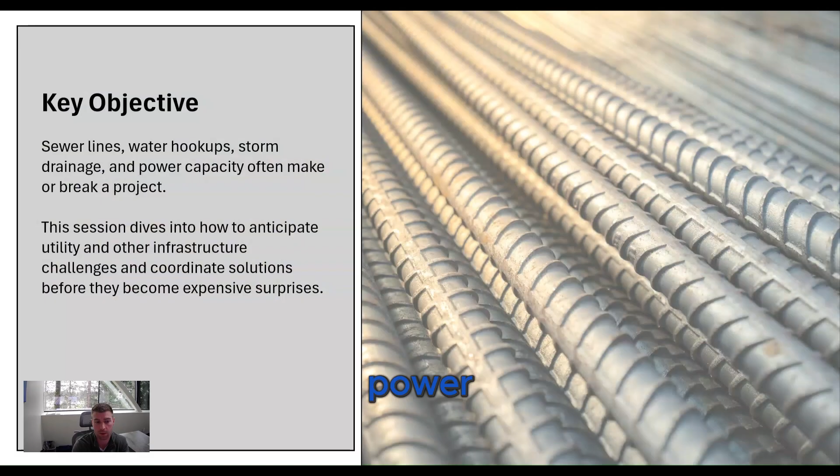All right, so we're going to be talking about sewer lines, water hookups, storm drainage, power—all the things that really make or break a project. So stay tuned as we go through those for more information.

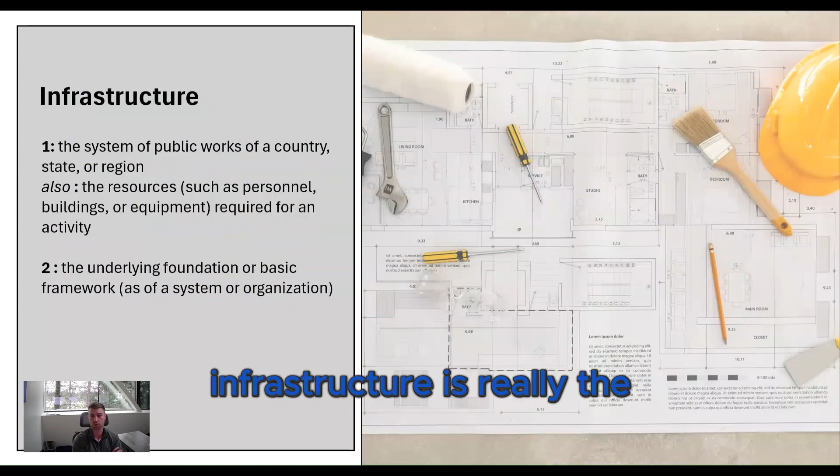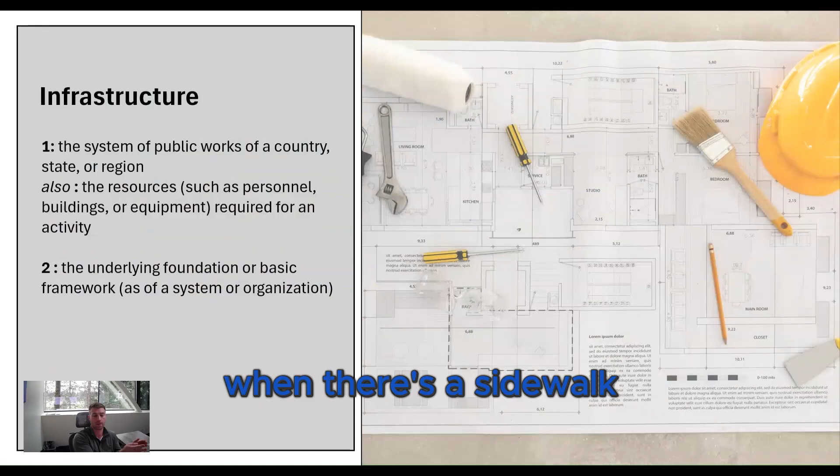All right, so if you don't know what infrastructure means, if this is a newer topic for you, infrastructure is really the public road around the property you want to develop. A lot of people get confused when there's a sidewalk and then a planter strip, thinking that's their property. In reality, the back of the sidewalk, which is up against your property line, is really where your property line starts and the public property begins.

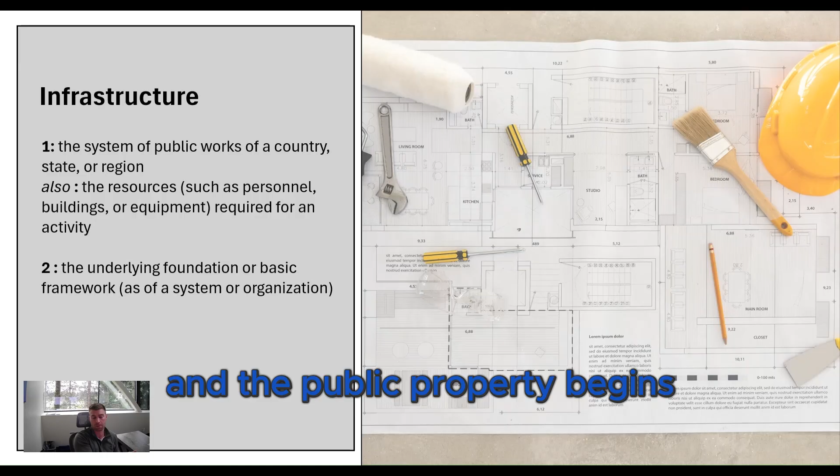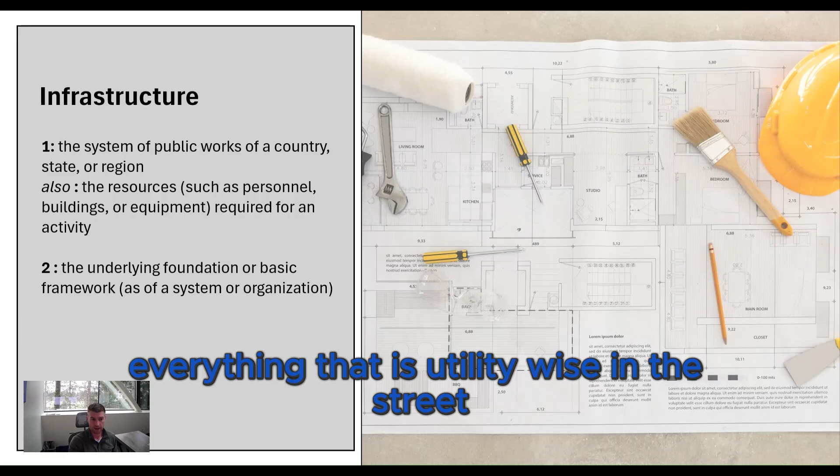So sidewalk, landscape strips, all the street work is obviously all public, but everything that is utility-wise in the street is also public. Your private property that connects into the public sector with all your power, water, sewer, and whatnot is really where you need to look for hookups and infrastructure upgrades.

All right, so in every city you have different requirements. The city of Kirkland's requirements are different than the city of Bellevue, different in the city of Redmond, different in the city of Issaquah. So one thing that's really important is making sure you're working with a good, vetted team that has worked in multiple jurisdictions, understands the process, and can ask the right questions to make sure you get good answers—to make sure you get the response and information you need to design a project that's going to be acceptable when submitted to that city.

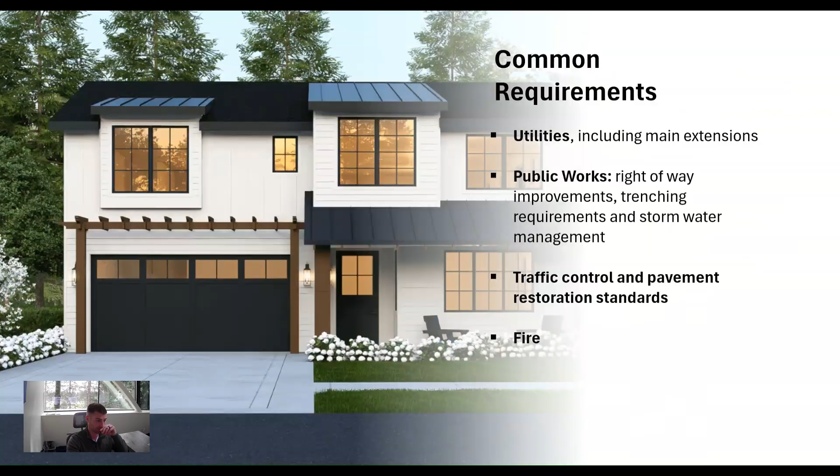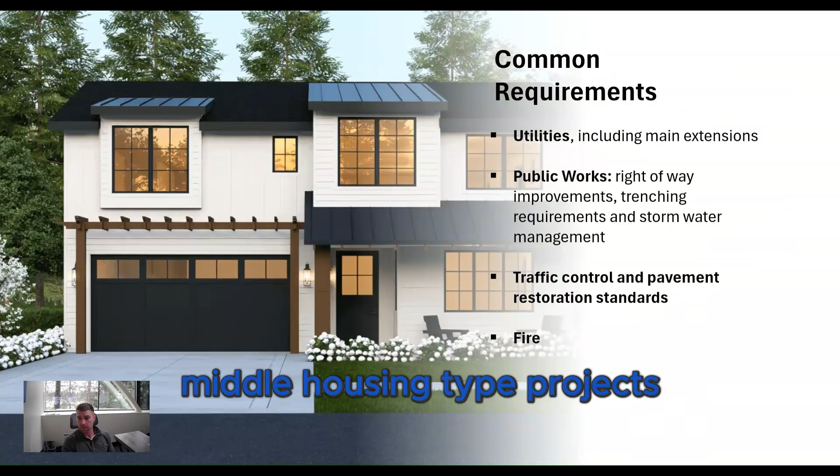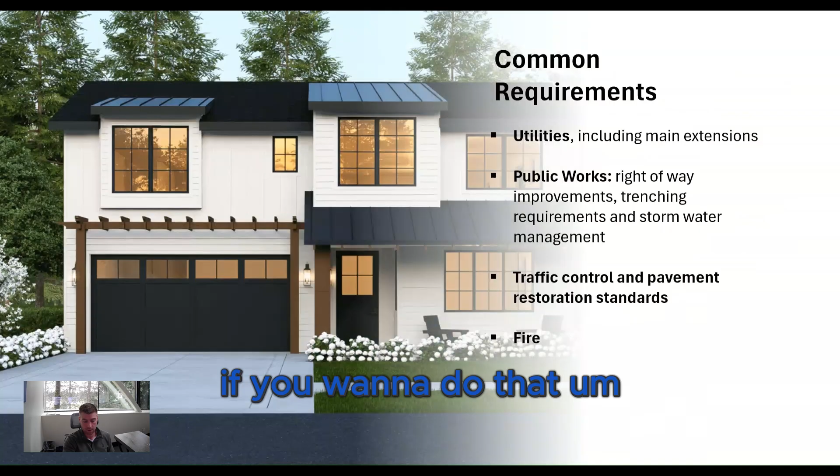All right, so common requirements. When you're doing infill middle housing type projects, if you're not tearing one house down to replace it with just one more, you may have to do utility main extensions—because what was one house is now going to be 3, 4, or more. That may mean you have to upgrade the sewer, upgrade the storm, upgrade the power transformer, or bring gas to the property if you want to do that. So these are common requirements, definitely things you want to look at.

And how much does that cost, and how long is it going to take, and how much does that impact the project financially to make it either not make sense or it still makes sense because the property can absorb those costs. Doing these works is going to create traffic control, you're going to have to do pavement restoration and whatnot. So just some things to really think about as you're developing a property.

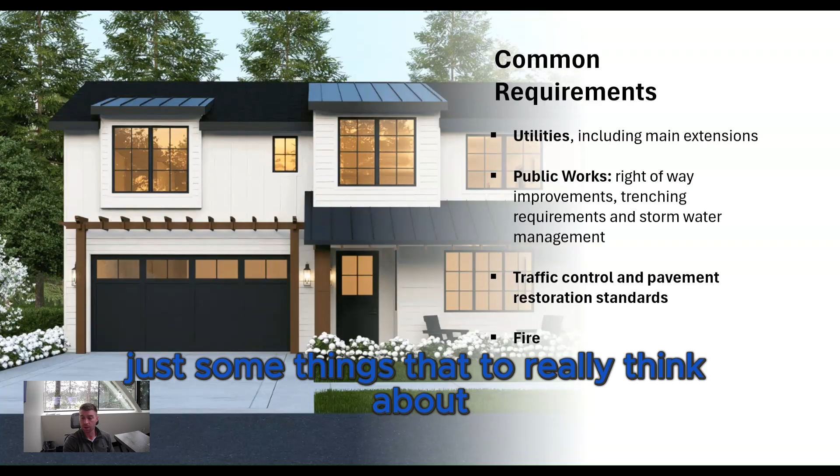As far as permitting and review agencies go, you're going to be working with multiple different agencies within the city or jurisdiction as you're talking about infrastructure and right-of-way improvements specific to that one project. And that's not including all the other things. You're going to be working with the city planning department, which is going to include public works, which is going to include fire, which is going to include the utilities. And sometimes the utilities are not always within the city, they're within a different jurisdiction.

So for example, if you're in the city of Kirkland and you're building in Finn Hill or Juanita, you're going to have to work with Northshore Utility District, which is going to serve that lot within that city for your sewer and your water, but your gas is going to come from PSE and your power is going to come from PSE. So you may be submitting a project for city approval, and you may not know that you have to actually submit a different set of plans to the utility district, which is going to review, approve, and sign off on the utilities that the city doesn't actually manage.

So sometimes people get this wrong. We've had people come to us and say, hey, I got this project, and I'd ask, well, did you talk with Woodinville Water? Did you talk with Northshore Utility District? Did you talk with these other jurisdictions that are not within the city, but are kind of part of the whole project? Knowing what to ask and how to get through it is super important.

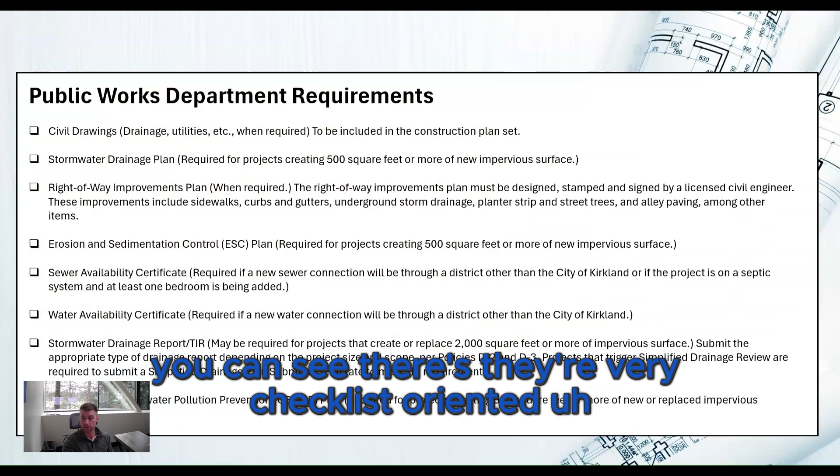So this is a typical public works department requirements list, specifically for the city of Kirkland. You can see they're very checklist oriented, to make sure that you're submitting everything that they require, and that you're making a full, complete application as they receive it, so you don't have to go back and forth with the city or the reviewer to provide the information they're requiring.

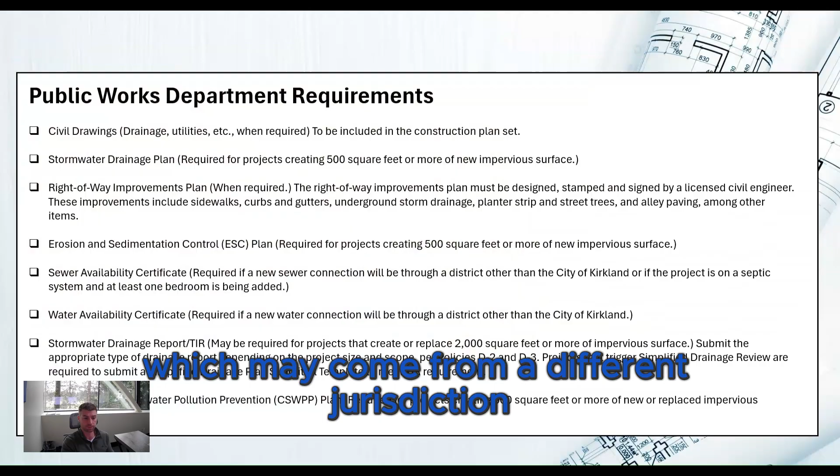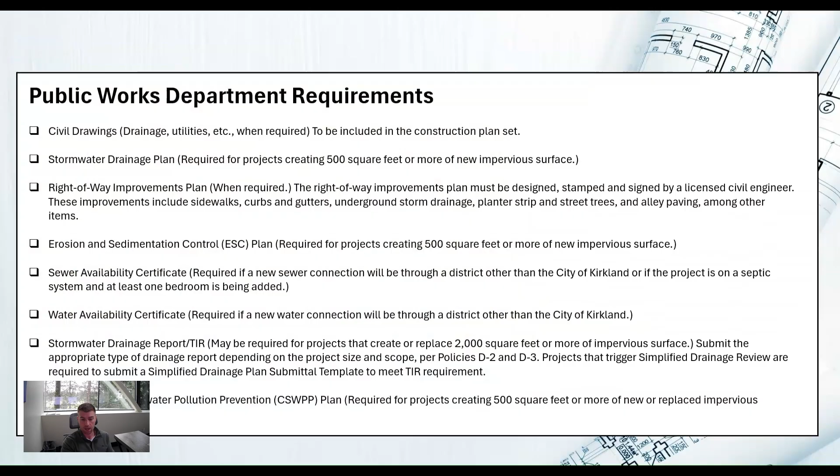This checklist shows that if you're working with public works, which is every time, you're going to need a set of civil drawings. You're going to need a stormwater drainage plan, a right-of-way improvement plan, erosion and sediment control, your sewer availability, which may come from a different jurisdiction, your water availability, which may come from a different jurisdiction also, your stormwater, your TIR, your construction stormwater pollution plan. Public works departments also include your soils report and your public works improvement plan.

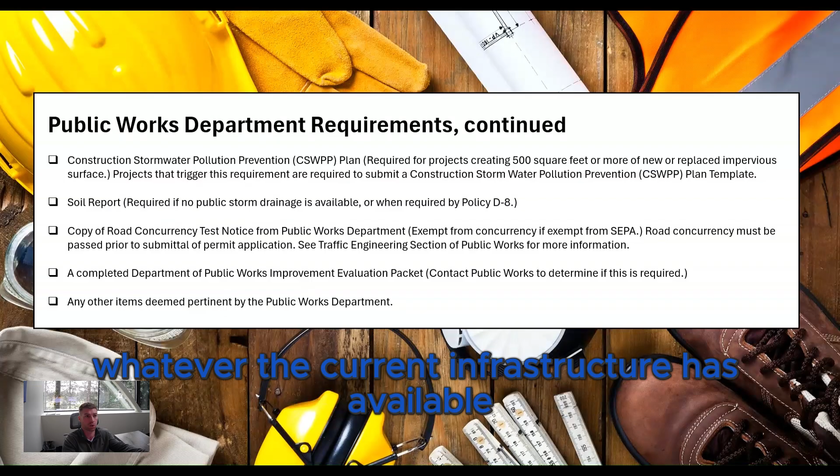So this is a lot if you're working on just one project in the street. Think about it, everything that's in the street has soil, has utilities, has different setbacks and spacing, different capacities, and you're wanting to build something on your lot that may or may not be able to withstand whatever the current infrastructure has available for water, sewer, or downstream analysis of how that's going to impact that specific storm in the street. These are all things you have to consider as you're working through your project.

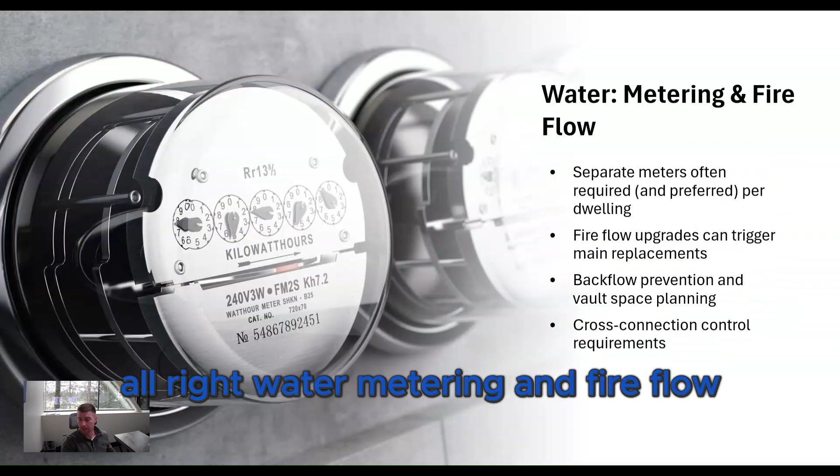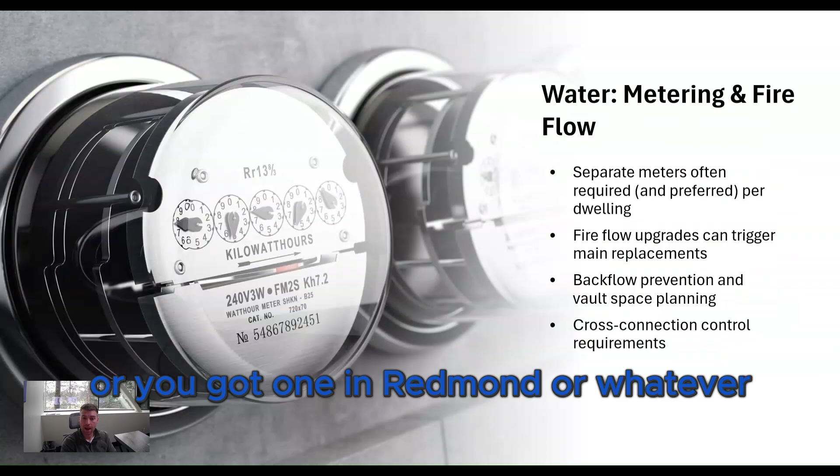All right, water metering and fire flow. If you have a project in Seattle, Kirkland, Bellevue, Redmond, or wherever, just know that your water capacity, even street by street, the pressure of water in the street is going to be different. And if you're adding 4 or 5 homes on one lot, you want to make sure you're actually going to be able to get enough water to each unit based off the requirements, based off the number of bedrooms and bathrooms, and also based off fire flow requirements.

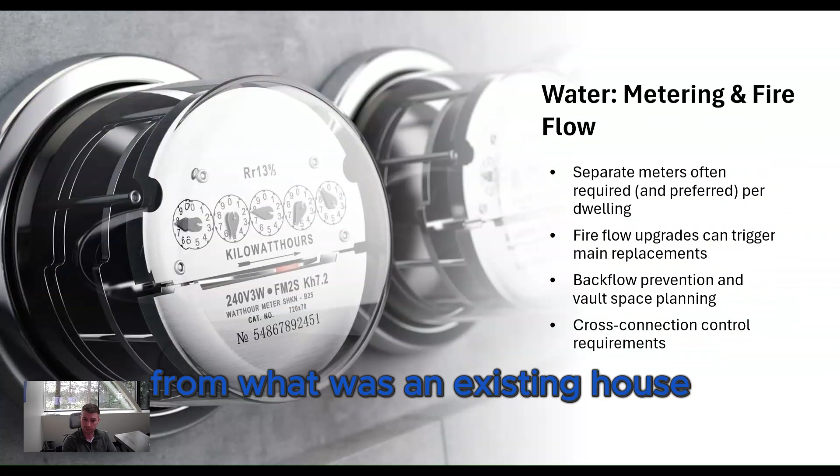If you're building 4 or 5 homes, you may need to go from a 3/4 inch water meter from what was an existing house to a 1 inch water meter, and then add a 1 inch water meter for each individual unit. You usually want to keep separate water meters for each individual unit, because that way your billing is separate and you're not talking with your neighbors or sub-metering things off. It's a little more expensive, but for a for-sale product, it's actually better for the customer buying that unit, and it's just easier for tracking and everything else.

As we talked about, you may need to install a new water line, extending water depending on where it starts and stops in the street. If you have one long private spaghetti line going all the way down with an easement through your neighbors to tap into the water main, you may now have to bring that water main up to the corner of your lot to service those 4 or 5 additional homes you're bringing onto your lot. Accounting for that cost, how deep it is, what kind of pressure and capacity there is, and whether you have to add any more fire hydrants are things you're going to want to look at.

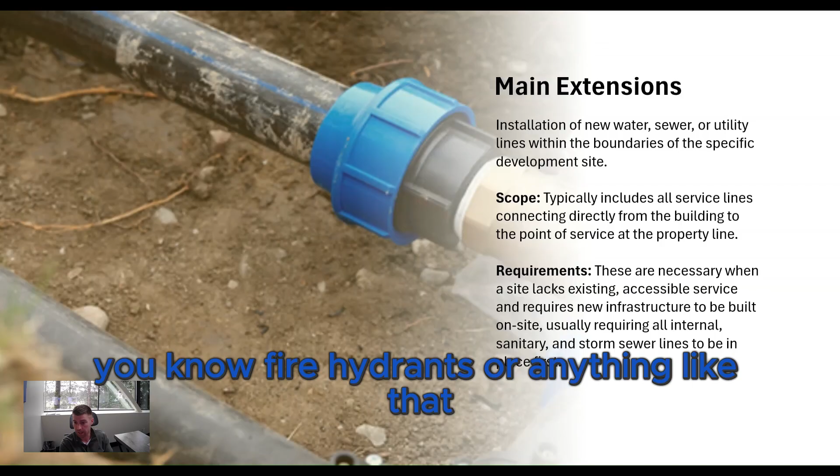All right, sewer capacity, kind of the same thing. One house, one sewer. If you're doing a tear down of an existing house and just adding one additional house on top, you may not need to do any kind of sewer extensions or upgrades.

But you really want to do a sewer scope of the existing private sewer line that goes into the public sewer line in the street, to make sure it's still in good condition. For example, if you're in Seattle and you've got a root that's going right through the sewer, or it's cracked or collapsed, you're not going to be able to salvage that by relining the sewer. You're probably going to have to cut into the street, replace that whole private sewer line that goes into the sewer main, which comes with additional costs, patching the street, and different permits you've got to do.

So, tearing one house down and putting one house up, make sure you're doing a sewer scope to confirm it can be reused after you line it. If not, account for the cost of retapping and replacing that private sewer line.

Same goes for tearing one house down and putting 4 or 5 homes or more on one lot. Different cities have different capacities for how many units you can fit on one private sewer line. So if you've got one house you're tearing down and 8 houses going up on the new lot, in the city of Seattle you can put 8 units onto one 6-inch private sewer line that goes into the street. But in Redmond, you can only get 4 units on one sewer line, so you may have 2 tandem private sewer lines running side by side, probably in the driveway, doing twice the amount of work than in a different jurisdiction. Just make sure you understand that.

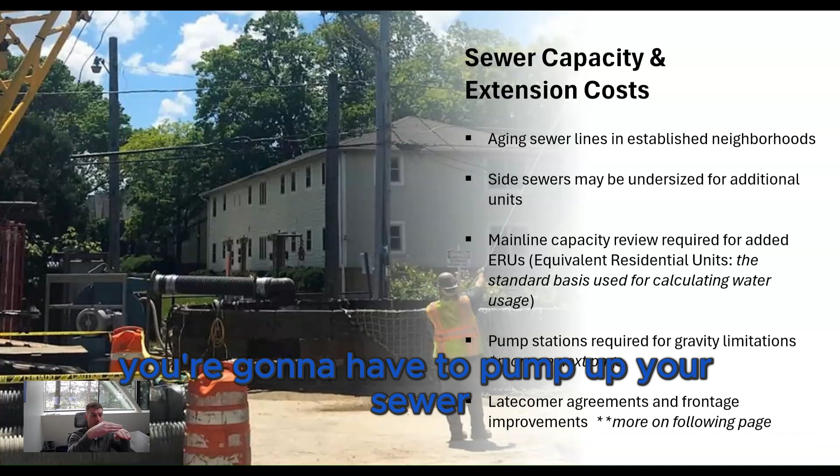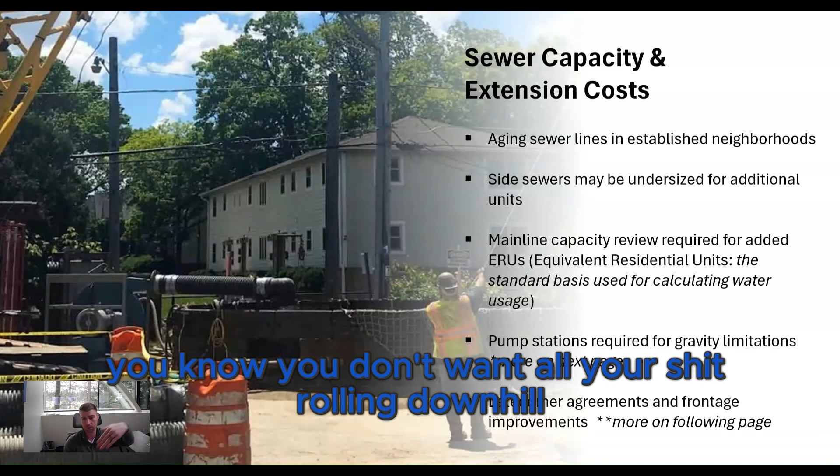Also consider the topography of your lot. If you have your street right here, and a house here, and you want to build on this lot down below, you're going to have to pump your sewer and storm water up to the mains, which means you're going to have to make sure you have a pump for that. You're going to need a backup generator, because if the power goes out, you don't want everything rolling downhill back into the crawl space. These are all things you really have to think about, which add additional costs.

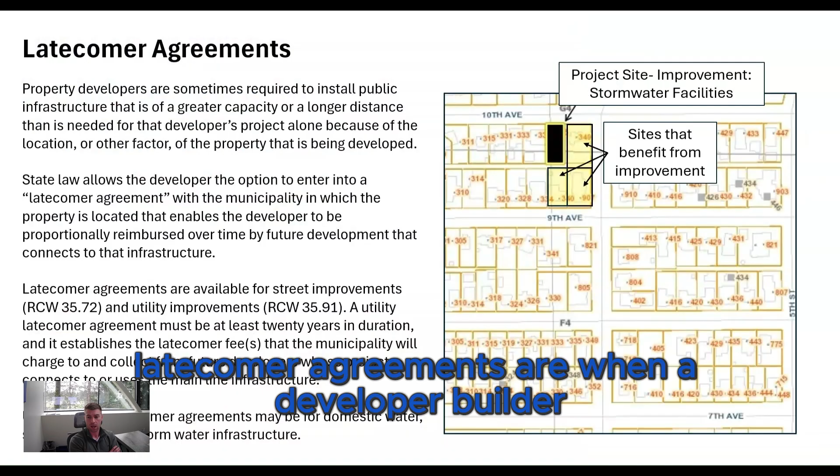All right, so latecomer agreements. Latecomer agreements are when a developer or builder improves a piece of property and you benefit from it.

For example, let's say you're on a septic system on a piece of property, and then a builder develops a lot down the street from you, and they have to drag the sewer line through the street and up to the property they're developing. Then you, a year or two later, build a house, or two or three. You benefited from them bringing that sewer line to their house, because now you can get your house off septic and tap your new houses into that sewer line.

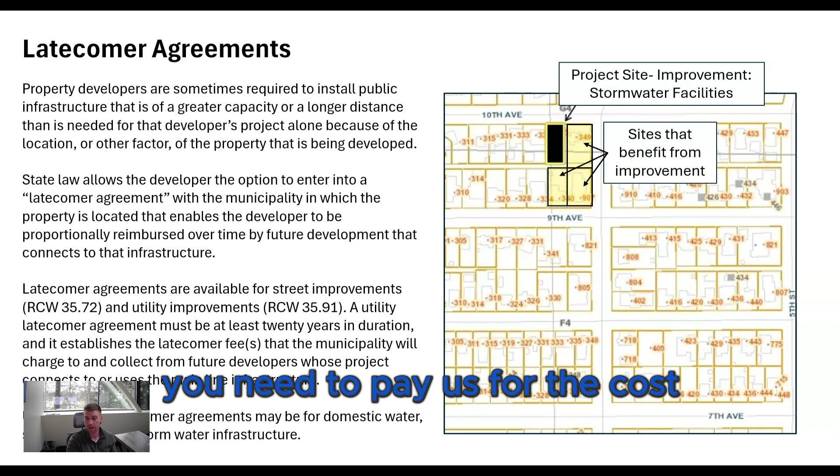A latecomers agreement may be recorded on title, which specifically says, hey, you need to pay us for the costs that you are now benefiting from.

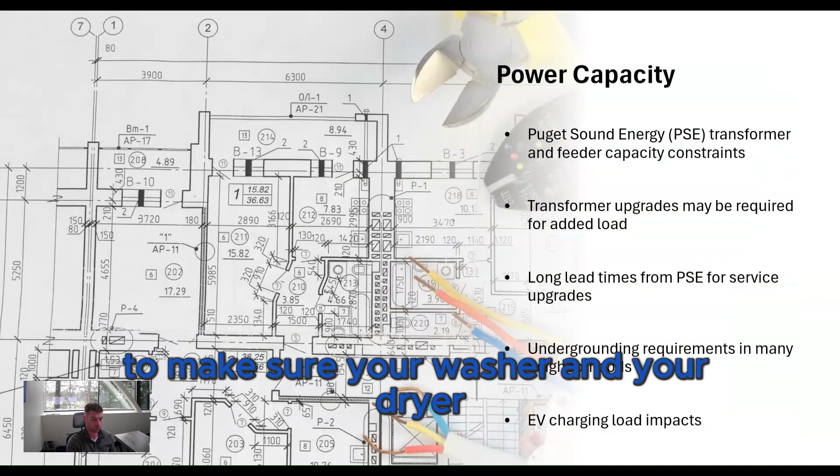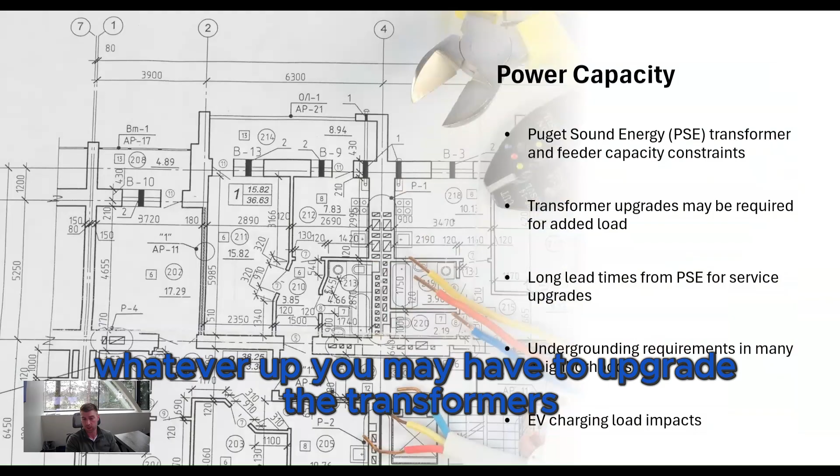Power capacity. So power, obviously you need to make sure you've got enough power for your washer and dryer and appliances and lights and security system and everything else working. But if one house is getting torn down and you're putting 4, 5, 6, 10, 12, whatever up, you may have to upgrade the transformers, which are on the power lines or power poles - those gray circular things hanging there. Those are called transformers, and you see some on the ground in the street if the power's underground. You need to make sure you have enough power capacity, just like for water, sewer, or gas, because you may have to upgrade that.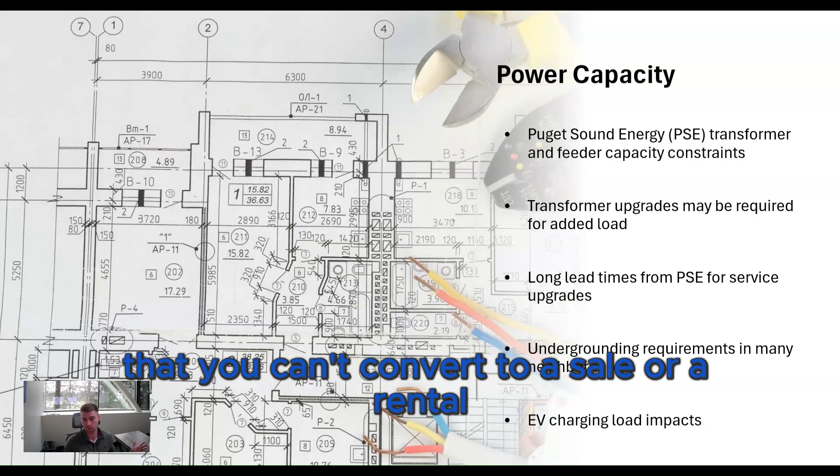Especially during COVID, with the chips and shipping and everything getting backordered, you had to really make sure you planned long lead times for that. It may have taken 12 to 14 months or longer to be able to get a transformer if you wanted to build out a project. So getting ahead of those things and making sure you're not sitting complete without power is really important, because that chews into your interest on something you can't convert to a sale or a rental.

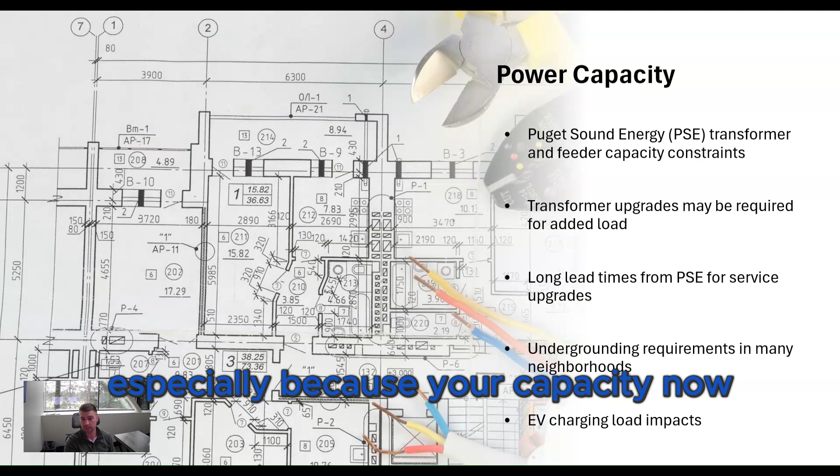So considering these things, the long lead times - how long does it take? When can we order these? Do we need to upgrade the power lines? These are all things you want to make sure you're doing, especially because your capacity now is probably going to be a lot higher given EV chargers and other requirements as part of these projects now. Case in point: supply shortages, power capacity delays, long-term shortages, cost requirements. Make sure you're always looking at the utilities and infrastructure and what those impacts are as it relates specifically to that project.

Street dedication. Let me see, hold on. I'm going to skip forward for a minute because I think we have a slide that shows exactly what street dedication is. Some lots will go out into a private road, and it shows on title that they've got a bigger lot, but when you redevelop, you actually have to dedicate part of your property to that city or jurisdiction. That's basically you giving your property away for free to upgrade whatever the city or jurisdiction has requirements for in their comp plan updates.

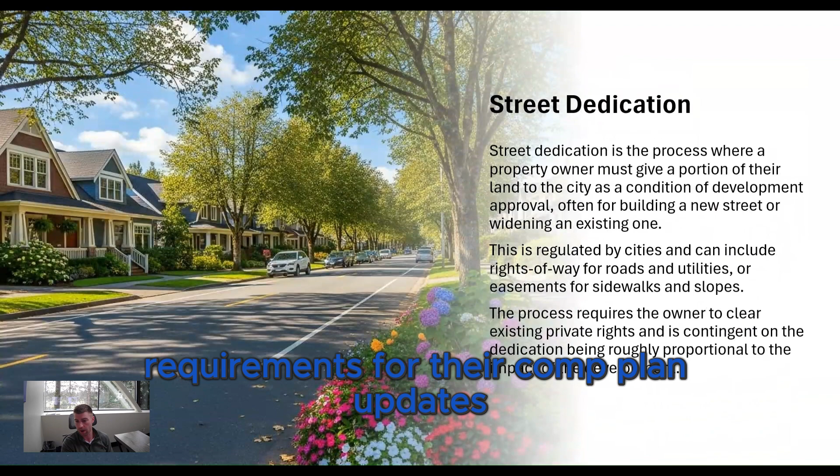So let me see if I can find a photo of that because that's up here. I'm going to skip ahead for a minute. Wow, we got a lot here. Here you go, here you go.

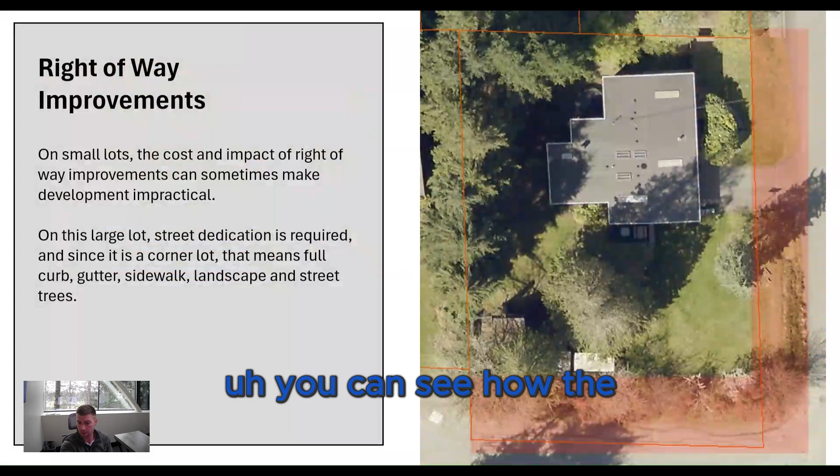This is right-of-way improvement. You can see this red section here, and how the line to the left jogs down into the street, which then cuts over to the corner on the right-hand side and goes back up. That whole red section, you're going to have to dedicate to the city, which means that on title, that property looks like it's got a larger lot, but in reality it's a much smaller lot because you're going to have to dedicate that section of property to the city, and then your lot will be smaller.

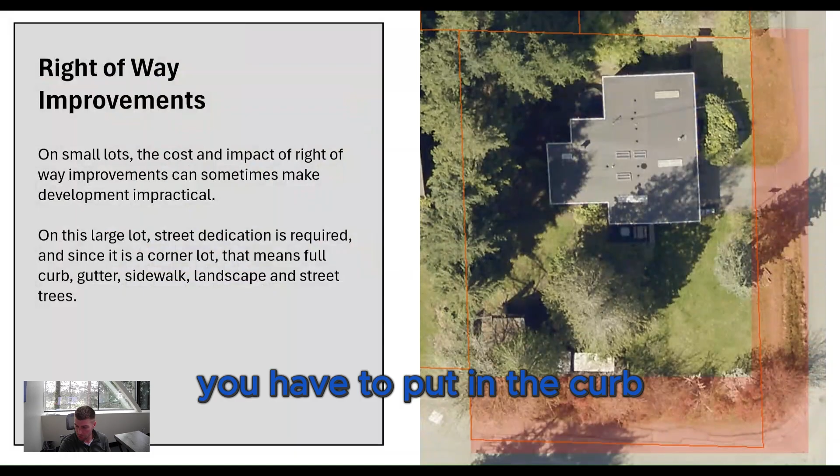You have to put in the curb, gutter and sidewalk, and so that affects your total FAR calculation, your impervious surface, and everything else you have to do for the number of units you can fit. So definitely something to look out for.

Let's go back. I'm going to try and speed things up here, I've got about 13 minutes left on this thing.

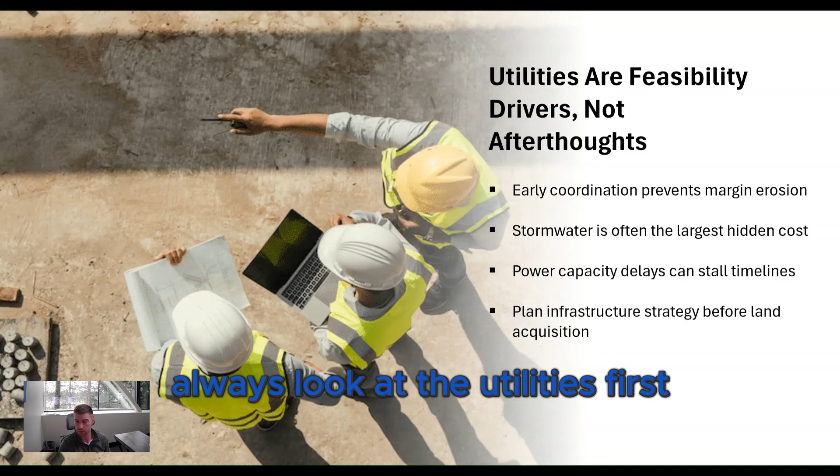Utilities are a feasibility driver, not afterthoughts. So obviously, whenever you have a piece of property you want to build on, always look at the utilities first and foremost. Does it make sense? Are they at the lot? If not, how much is it going to cost to bring it there? Do you need to upgrade it?

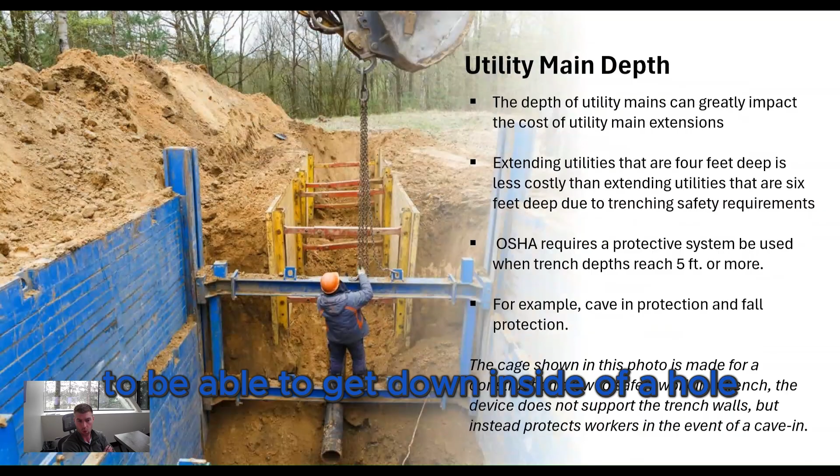This is a really good photo. You can see what's called a trench box, a big blue box that provides access for this worker to get down inside a hole. There's a big pile of dirt on his left-hand side holding back the dirt, so he can get down into that sewer line, or whatever it is, to do his work.

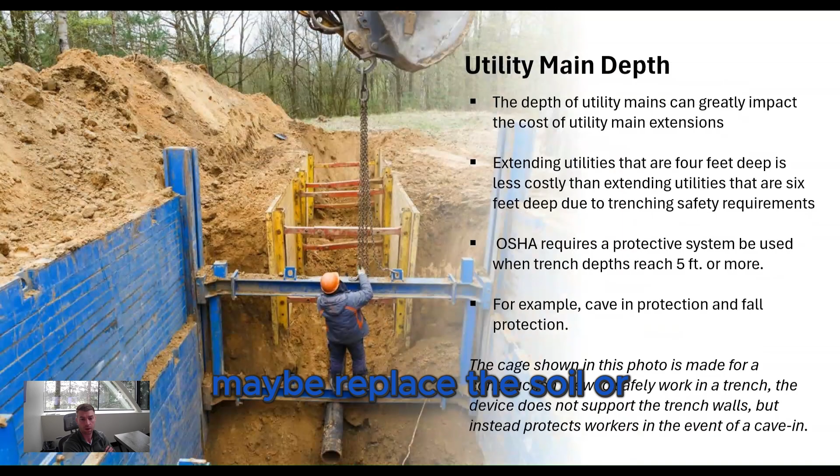That's a very expensive amount of work you have to do. You have to dig the hole, put the trench box in, get to the sewer, and depending on how long, you have to trench that all the way out, maybe 100 or 200 feet. That's a lot of work. Then you have to put dirt back, compact it, there's a whole process. You probably have to either replace the soil or bring in new soil, and bring in a bunch of drain rock.

It's a lot. So if you have to do an extension or utility upgrades, looking at the depth of the utility in the street is really going to impact the cost, which is going to impact the cost of the project.

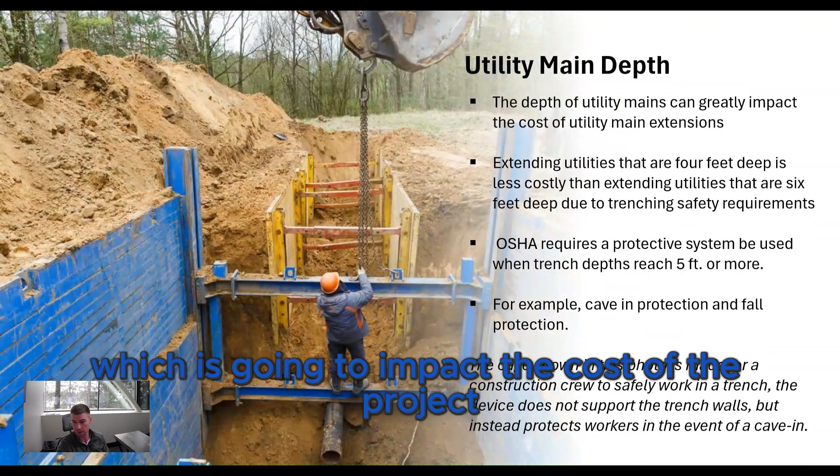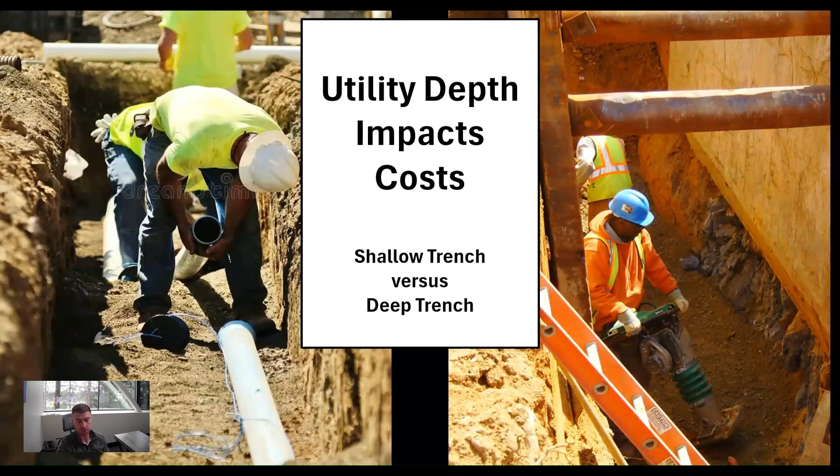You can see on the right-hand side how deep the utility is, and on the left-hand side it's really shallow, maybe 3.5 feet or so. You can see the trench is only about the height of the guy's waist—if he's about 6 feet, that's about 3 to 3.5 feet. That's much cheaper than having to do the trench boxes and everything else.

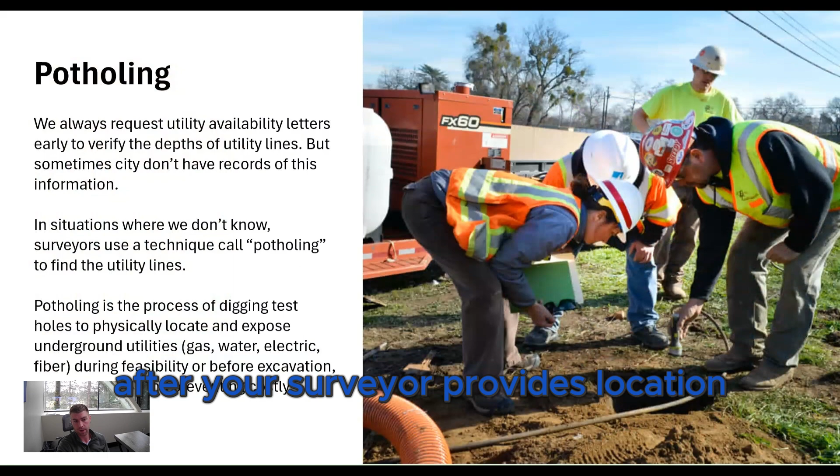If you don't know the depth of the utilities in the street, you can do what's called potholing. You dig a hole after your surveyor provides the location of utilities, slowly digging until you can see where the utilities are and measure how deep that is. Then you can do your math: if it's 3 feet, it's a lot cheaper than if it's 14 feet, where you'd have to dig super deep with all the export, import, and trench boxes for 100 feet down the road. So one's going to be more or less expensive.

Reusing utilities—I talked about this earlier. If you've got an existing house and you're just replacing it with a new one, you can reuse a lot of the existing services: power, water, sewer, gas. You can usually just tear down, tap into, and reuse them. If that house was smaller and you're building a big house, you may have to upgrade the water for all the additional bedrooms and bathrooms and the people using it, but it's much cheaper than adding 5 or 6 homes.

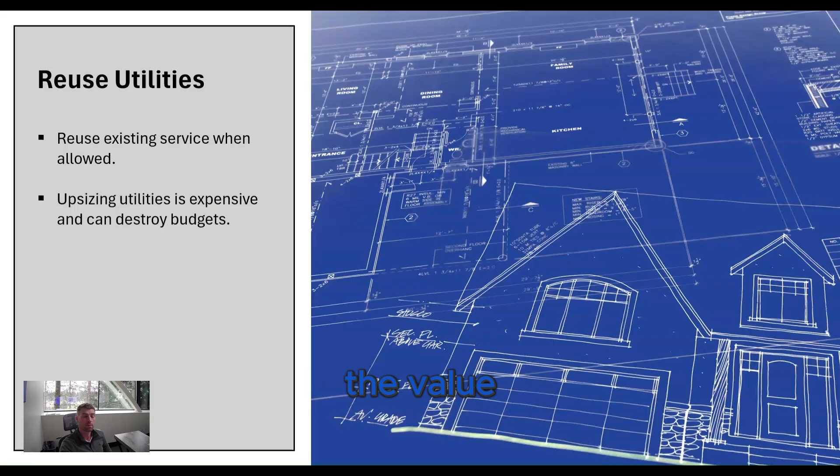But if you've got a really big lot and you're putting 5 or 6 homes on it, the value may be more beneficial than just putting one home on it. It really depends on where you're at, the values, the costs, and the time.

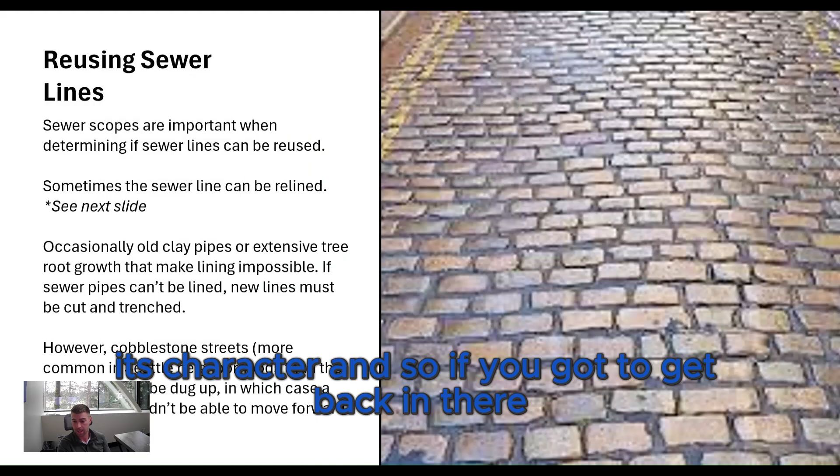Here's a really important thing: if you can reuse the sewer line, make sure you can. Even if you're tearing down one house, you can put 4 homes on one existing sewer line. This is super important, especially if you've got a cobblestone street like on the right-hand side here. If this was in Seattle, some areas specifically say you cannot cut or trench into that street because it's historical, and they want to maintain its character. So if you need to get back in there, you either can't, or you'll have a lot more costs to add new cobblestones and all that other stuff. Something to look into as well.

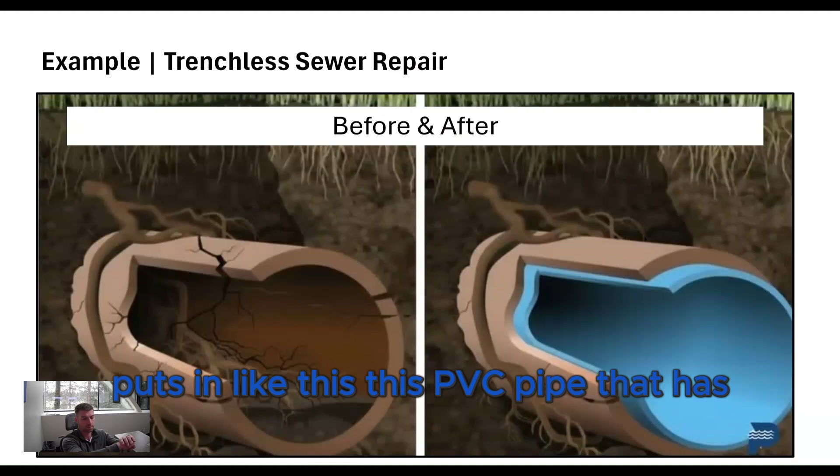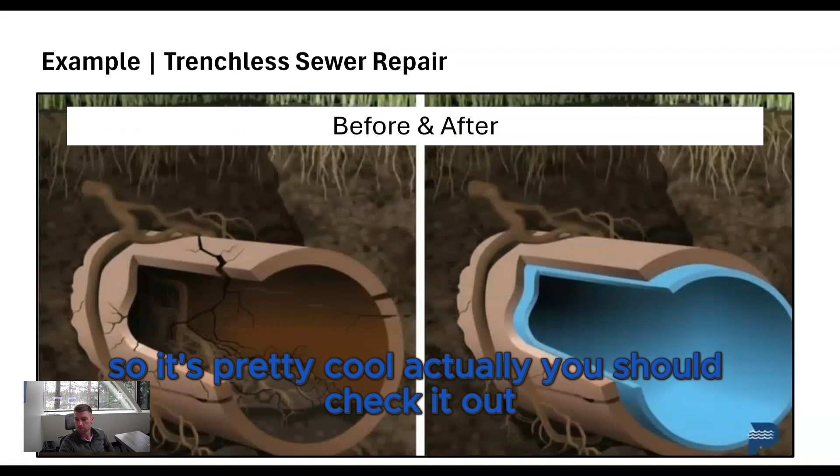Here's an example on the left-hand side of roots going into a sewer system, which cracks it and makes it leak. On the right-hand side, you can see a lining of the sewer line. Basically, it's like inside-out: they put in a PVC pipe that's got epoxy on the outside, then pressurize it so the epoxy goes to the outside of the pipe, and that turns it into a new pipe. Pretty cool actually, you should check it out.

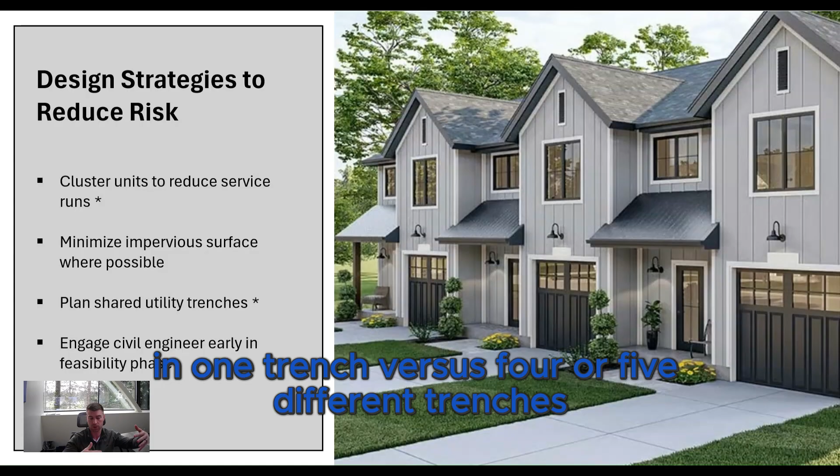One other thing you can do to make things a little cheaper is to cluster your utilities together. If you've got, say, 4 homes, don't run 4 separate private sewer lines. You'll have to do that for water and gas and all that stuff, but you can combine your sewer lines onto one private sewer, so all 4 come into one, and that one goes into the street rather than 4 different taps. That's going to cut down on your costs. And if you can cluster your utilities together in one trench versus 4 or 5 different trenches, that cuts down on all your different costs from trenching that many more times. So plan everything to be more efficient and cut down on your costs.

Here's an example of just clustering.

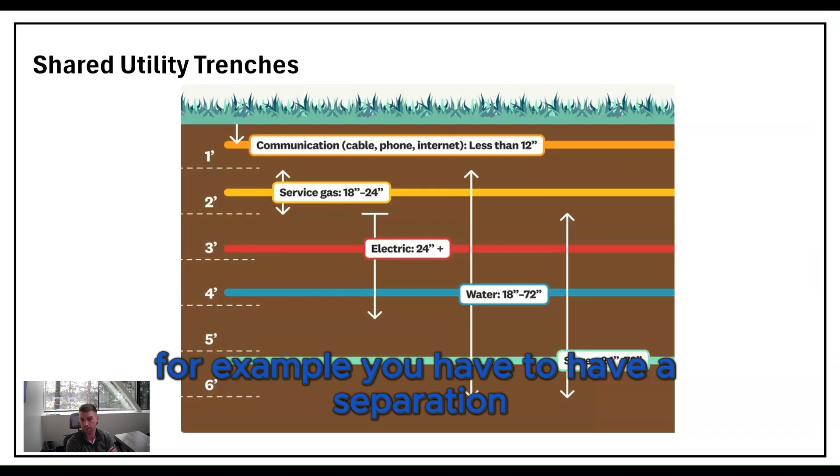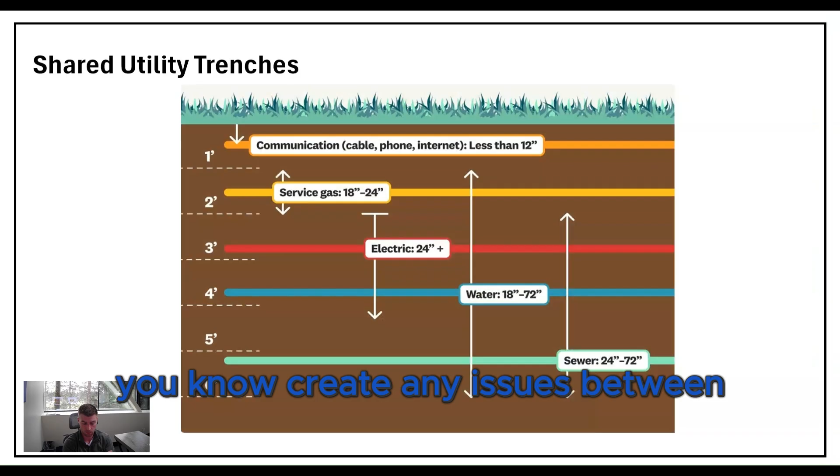Anytime you have any kind of utilities going in one trench, you have separations that are required for different types. For example, you have to have a separation between your electricity and your water. Everyone knows water and electricity don't mix well, so you have to have a certain separation between them, so you don't create any issues, if there was, I don't know, some kind of mole or something that chews on the electric line. You don't want that to happen. Not that it would, but you've got to have separation.

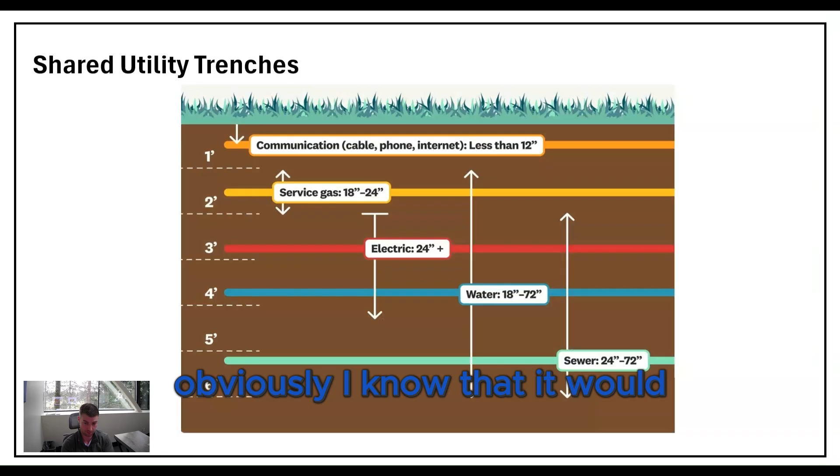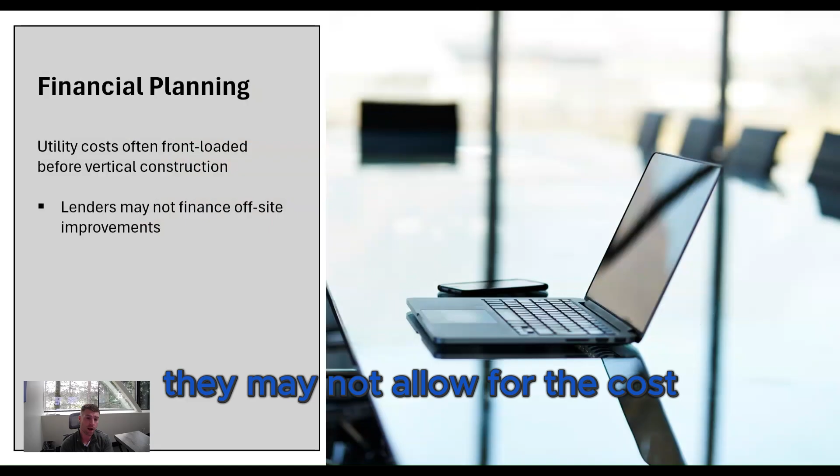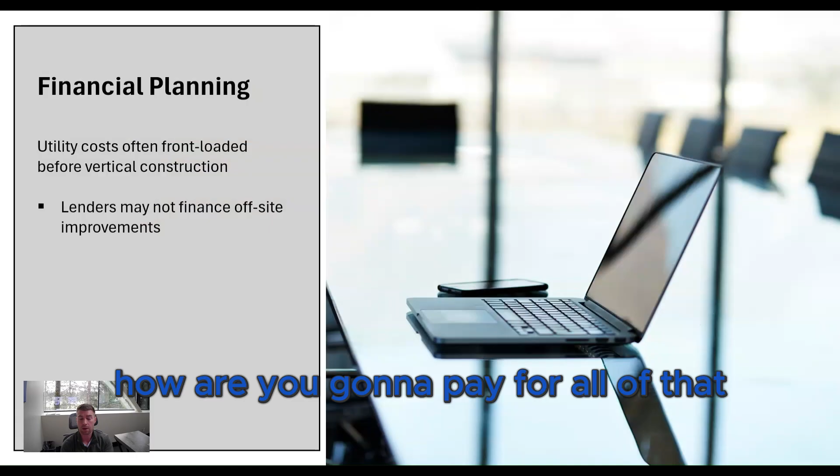Financial planning: make sure you have a lot of your utility costs front loaded. Depending on the type of loan and lender you use, they may not allow for the cost of doing all your infrastructure improvements, if you're doing a plat for example, before you get your final plat approval to get your building permits. So you need to factor in how you're going to pay for all of that if it's not something you can wrap into the loan, or figure out what kind of loan you need to make sure it is wrapped into the loan.

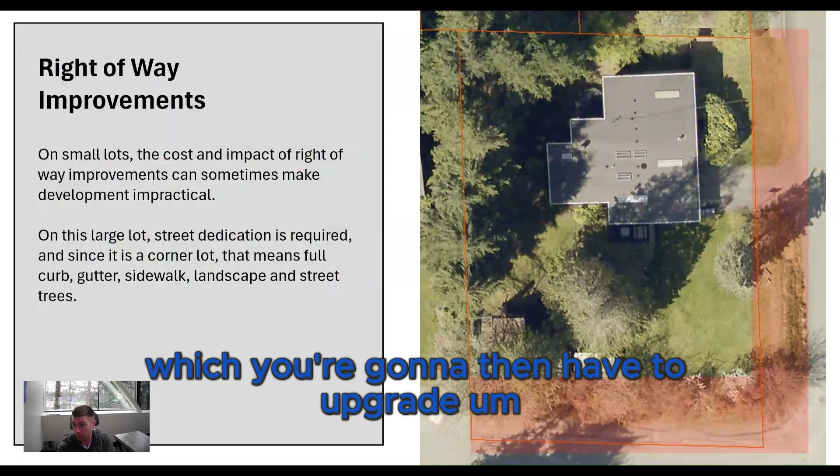This is the right-of-way improvement I was talking about earlier. You may have to upgrade the utilities, you're losing your private property here. You can see this big red section you're going to lose, which means you'll have to upgrade this whole curb, gutter, and sidewalk. You can see in the upper right-hand corner that sidewalk kind of stops right there. Well, when you start developing this lot, you're going to have to bring that sidewalk all the way down and all the way through, and then connect it over here on the lower left-hand side. So just make sure you got that factored in.

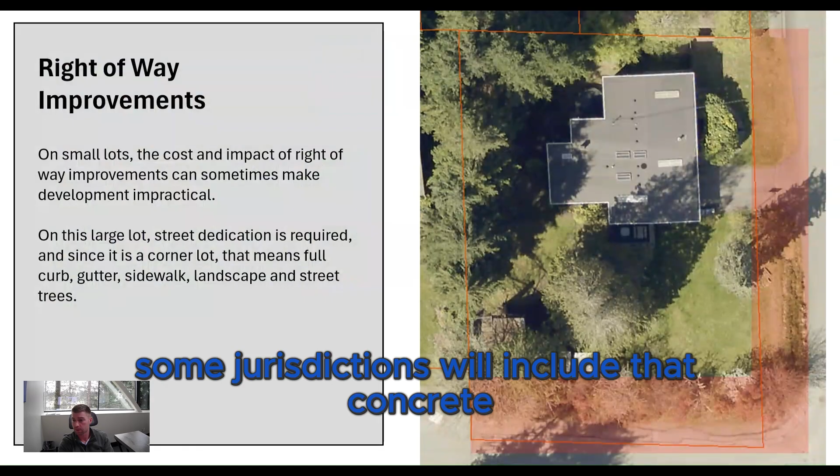And then also on a corner lot, if you're gonna do that work, that's additional concrete, and some jurisdictions will include that concrete surface square footage as part of your stormwater calculation, which will then increase the detention tank you may have to put on site. So just be aware of that.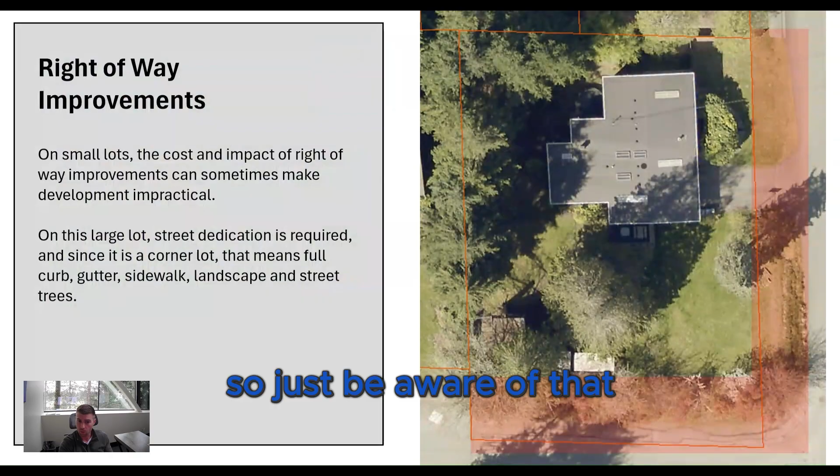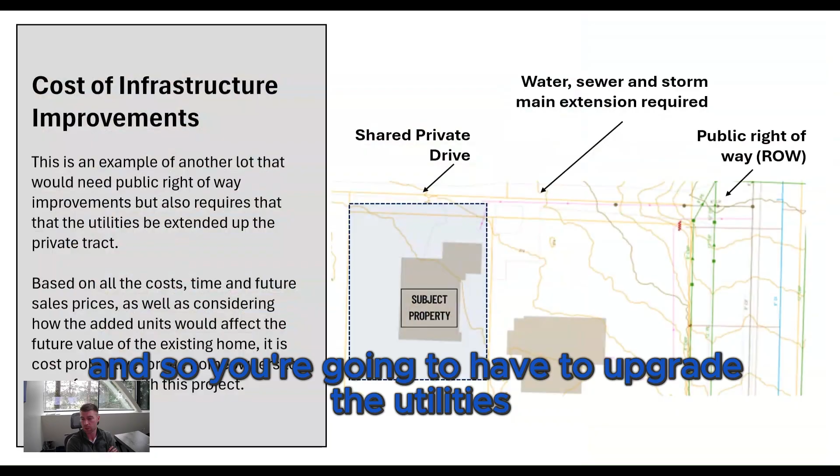Here's another case study of a property owner we were working with who bought this property on the left, the subject property, to put 6 units on, and didn't realize there's a private drive aisle to get access to the property, which doesn't have sewer because the house is currently on septic, so you're going to have to upgrade the utilities on that subject lot to add those 6 homes.

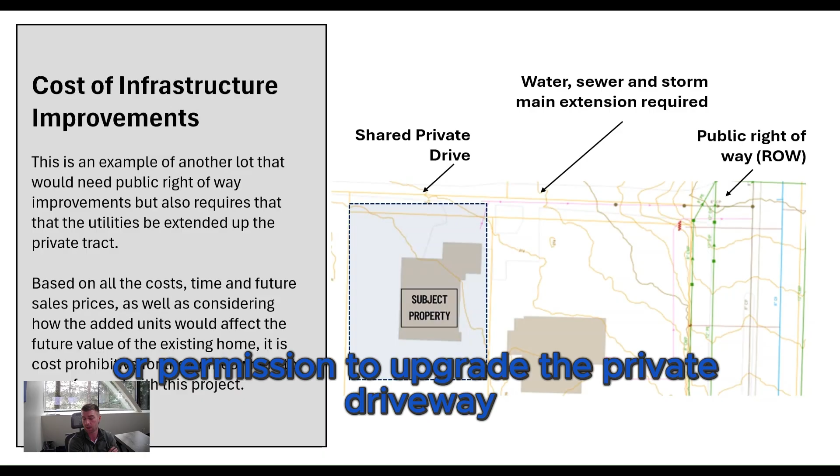And if you do that, and all the other properties around it are also gaining access on the private drive, then you'll need to get their agreement or permission to upgrade the private drive aisle because everyone else has an interest in it. So just something to consider. Also, dragging your utilities from the street on the right to the subject property, and the cost and time of that, you really want to factor into the financial viability of the project.

All right, reiterating the importance of due diligence. Make sure you understand the system, or process, of working with the jurisdiction you're dealing with, because you don't want your project just sitting because you don't know what you don't know, and you're having to work through the whims of what the city's telling you to do. So always make sure you're working with good consultants and contractors, and have a good plan in place to avoid delays, which add additional costs to the project.

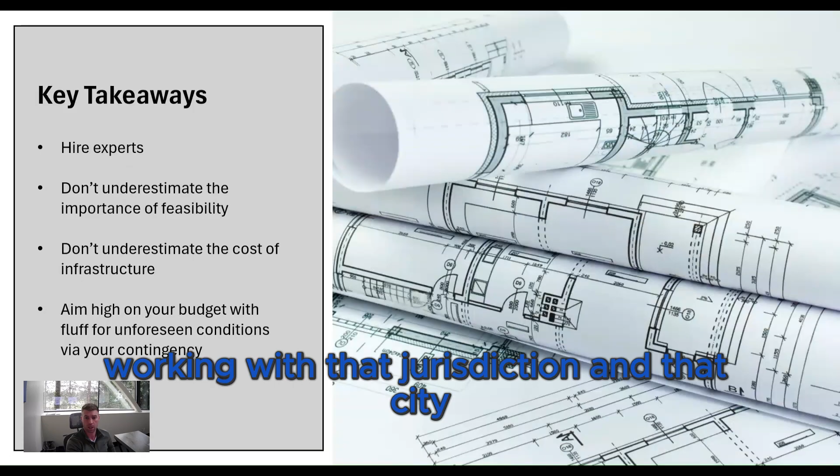All right, so the key takeaways here: make sure you're working with an expert. If you're going to work with an architect, or a civil engineer, or somebody like us at Liberty Investments, work with somebody who has a track record with that jurisdiction and city, and whose consultants are also working with that jurisdiction. They have personal relationships with the staff, and can confidently tell you what's happening, versus bringing a guy from Idaho to work in Seattle. They've never done anything there. They're going to have to work through the kinks, which costs more time, and they don't have the relationships, so there may be additional rounds of review and things like that.

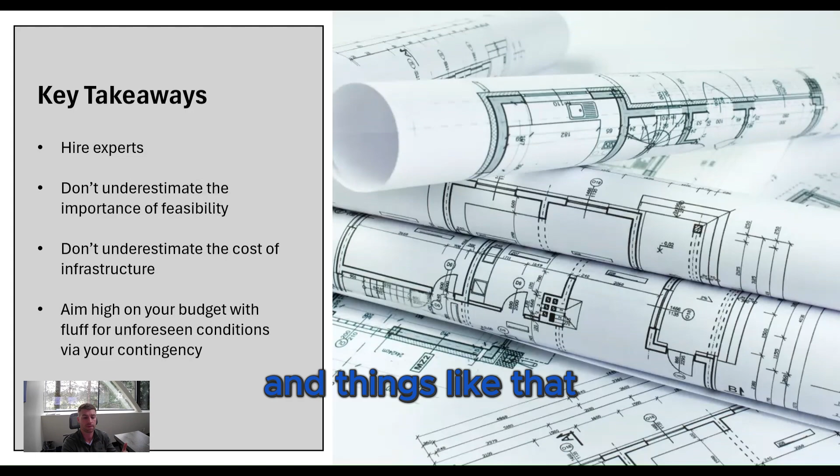All right, so us at Liberty Investments, we've been working on development projects for a combined 25 years. Our general contractor, who's our partner, has been in business for 20 years. I've been in the construction industry and development space for 15 years. Through that combined experience, we're working on a lot of different projects in a lot of different areas, with a lot of different experiences that we bring to the property owner, to make sure we set you up with a good business plan, look out for your best interest, and get you to the end result you're looking for, which is really maximizing your returns.

So if you're not aware, we have a pre-feasibility study that we provide through Liberty Investments. If you go to www.liberty-investments.net, you can click on the pre-feasibility tab there. This is everything that's included in your pre-feasibility study. It gives you a good, quick look before you leap, an early look at what's financially viable for your project, what's not, what risks you've got to look out for, what you should and shouldn't do, what makes sense, and what provides the best return.

And that is an early look, so that way you know that you're setting yourself up on the right foot as you work through that project. And then if you decide you want to work through that project, then we will manage that full process for you from start to finish, end to end, and provide a white glove service.

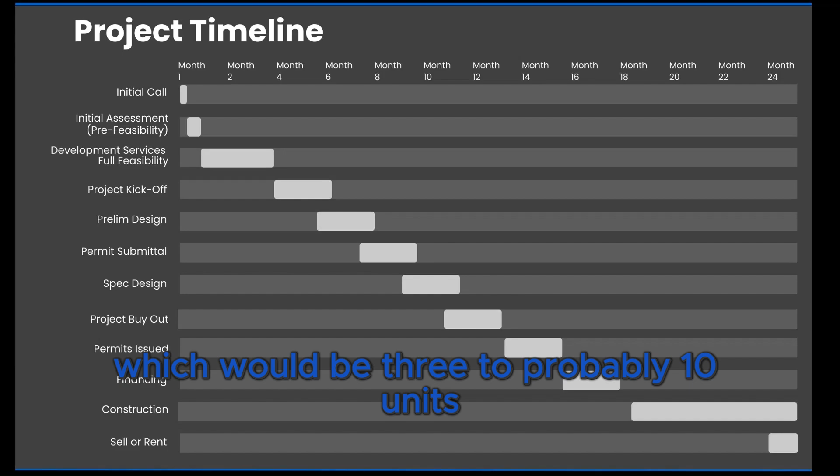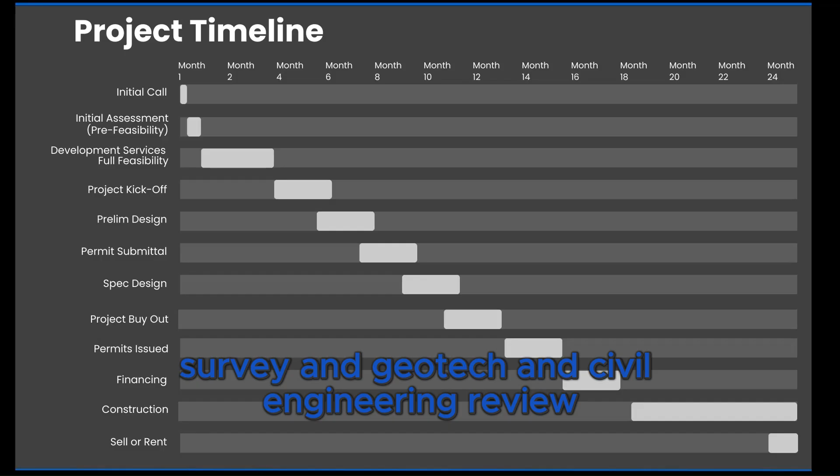Start with a call, you do the initial pre-feasibility. You're going to have to go through all the other feasibility items that were not included in the pre-feasibility, such as survey and geotech and civil engineering review, a pre-submittal conference, title review, and other things like that.

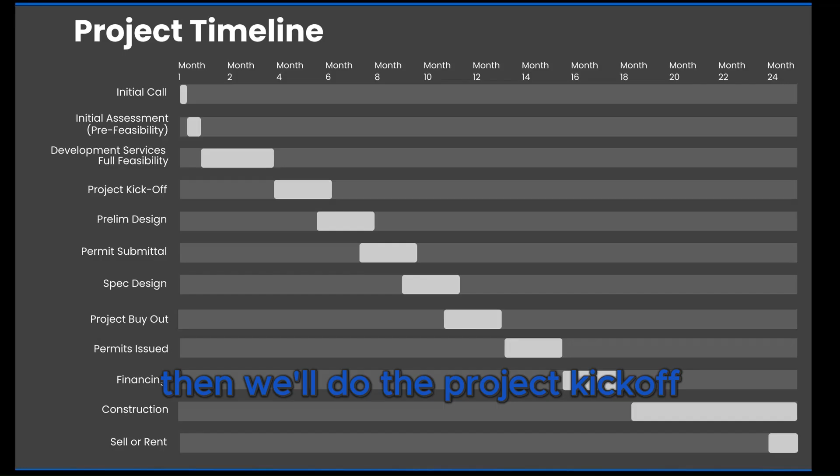If everything still looks good and you want to move forward, then we'll do the project kickoff. We'll do the prelim design, start working with the architects and the civil engineers and pulling that whole package together, putting that submittal packet together.

After we get everything submitted to the city, we'll start pulling together some designers and get some specs in place. What kind of roofing, what kind of color of paint, what kind of tile, what kind of cabinets, countertops, all the stuff, getting that all dialed in.

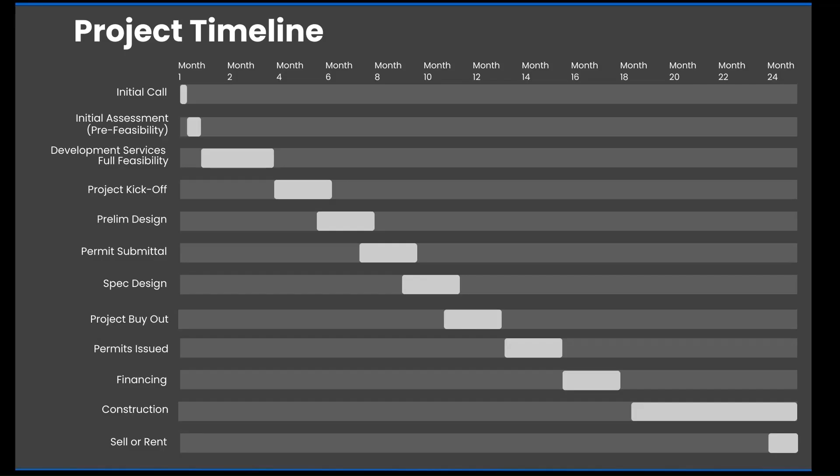Then after we have our project submittal pretty close to getting to issuance for approvals, we'll have that spec design put together and priced out with the contractor. And then we will move forward towards permit issuance.

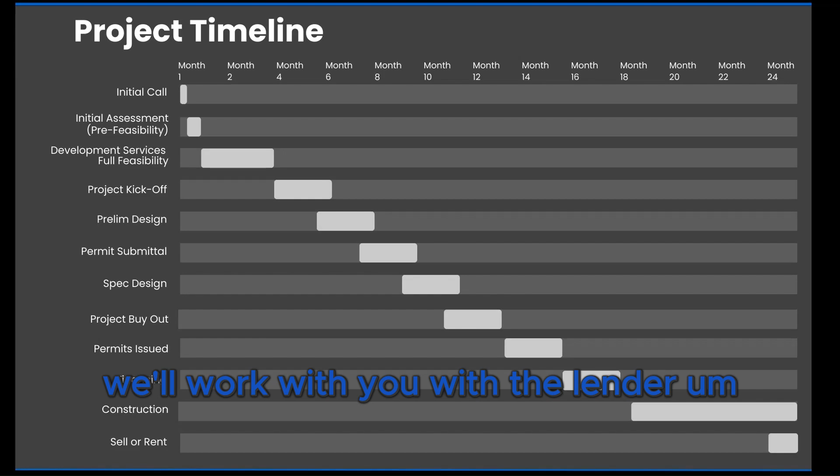After permit issuance is ready, we'll handle the financing. We'll work with you and the lender to make sure we've got a good bought-out budget, that we're helping manage that process for you, and that we're going to be managing the draw requests for you as well, because this may be something you've never done before.

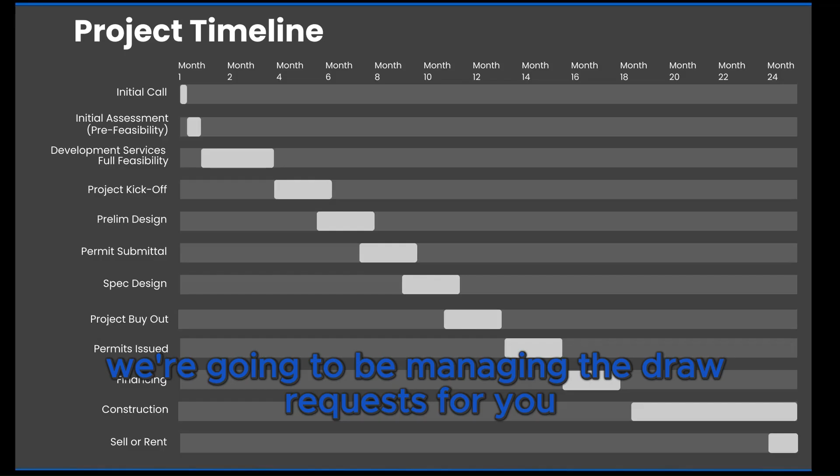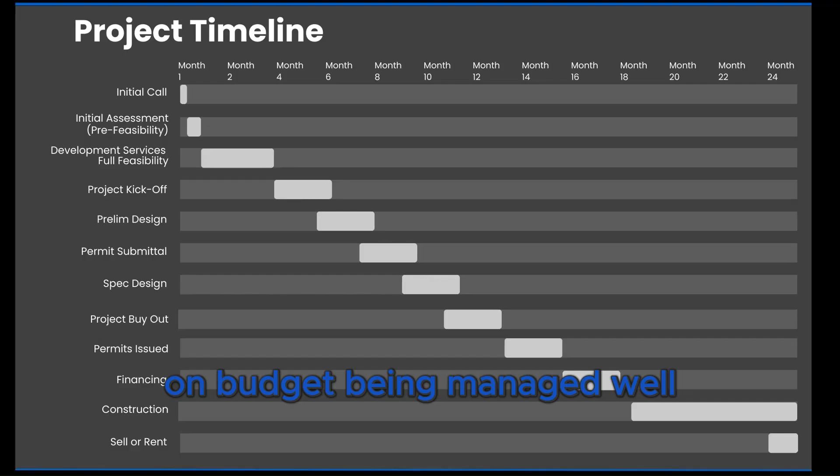Through the construction, we're going to have oversight throughout the whole property, the whole project, to make sure that things are on time, on budget, being managed well, looking after your best interest as the property owner.